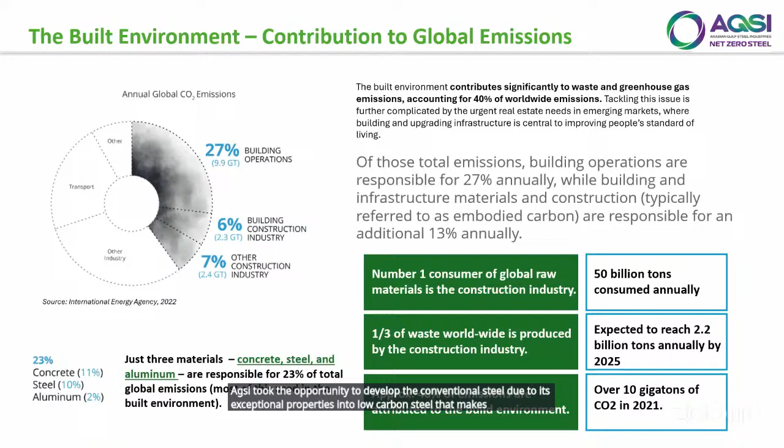Before I go in deep into our company's facts and offerings, I'd like to start historically on how AGSI became as it is today. Since our commercial operation in 2016, we have been a steelmaking plant that produces only steel billets locally in the UAE. This gave us an advantage at the time, as we were the only steel makers making steel billets and supplying to the big markets and big players in this market. Before, they used to purchase these billets from outsourced abroad.

Then by, let's say, 2021, we decided to include our own rolling mills for making rebars and sections. And from that time, in just under 2 years, AGSI went from being a new entrant in the steel industry to becoming the first carbon neutral steel plant.

So just to sum up our journey, we joined the UAE Sustainable Companies Pledge, being certified twice for lowest carbon emissions in the MENA region, participation in COP28 and Climate Week NYC as a net zero case study, becoming one of the chosen champions of the Industrial Transition Accelerator, focused on decarbonizing hard-to-abate sectors like steel, cement, and heavy manufacturing. Developing collaborations and partnerships with big players in the industry, like Aldar, the Institute, and soon many more to follow. This journey reflects our belief that industrial growth and sustainability are not mutually exclusive.

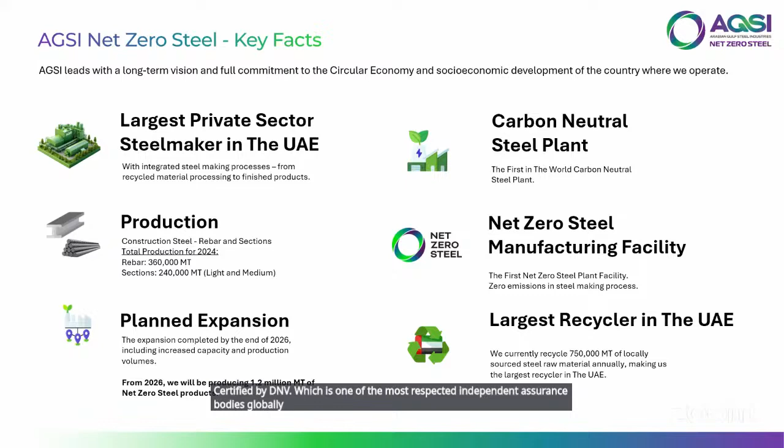So just to reiterate, AGSI produces the following: billets, rebars, and sections. All products are tailored to meet international codes and standards to be in line with project requirements when it comes to mechanical and structural properties and available grades and sizes.

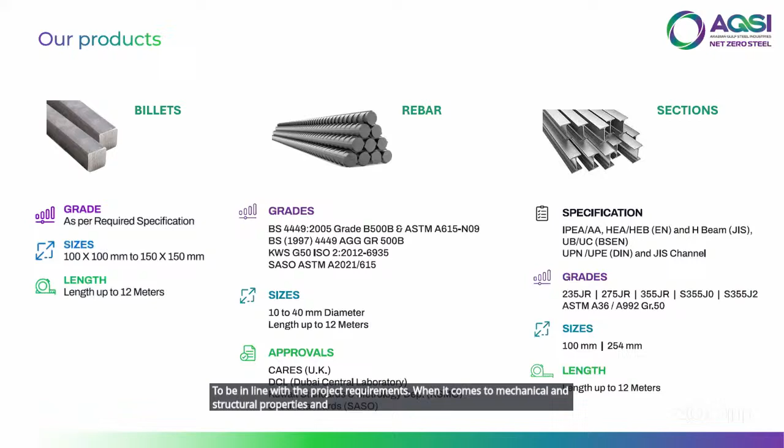So let me go through it one by one, starting with how billets are made. At AGSI, there are around 6 main procedures important for producing low carbon steel billets prior to rolling. We begin with 100% locally sourced steel scrap, which is brought to our facility in large volumes, a minimum of 50,000 tons per month.

Once the raw materials are received, it enters the scrap yard where it is unloaded and sorted based on type and composition, processed using specialized machinery like shears, shredders, and magnets to meet furnace stock specifications. On average, we process around 1,200 tons of scrap per day to feed our steel melting operation. This ensures consistent melt chemistry and energy efficiency in the furnace.

Third is the most important part: the prepared scrap is then charged into our induction furnace technology. We operate a total of 4 furnaces, each with 30-ton capacity and 12 megawatt power rating. Unlike traditional blast furnaces or electric arc furnaces, induction furnaces do not burn fuel. Instead, they use electromagnetic induction to generate heat directly within the metal, so no use of oxygen will be required, as it will be fully operational through electricity. This results in no CO2 or other greenhouse gas emissions whatsoever, more precise control over melt temperature, lower heat loss, and faster startup times. This is the cornerstone of AGSI's net zero strategy: clean, efficient, and scalable steel melting.

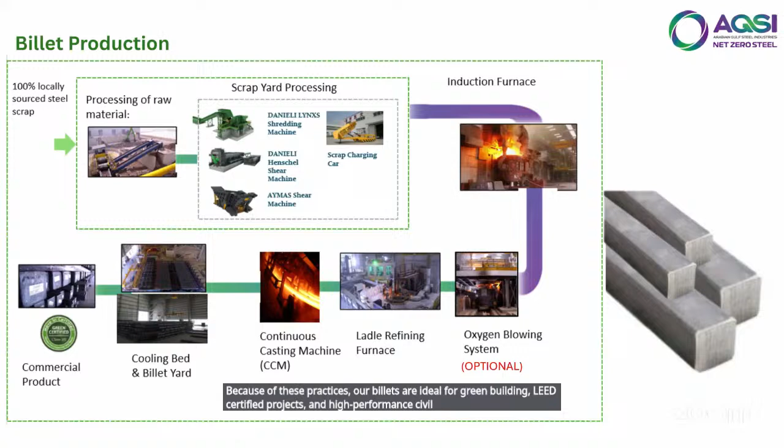Now let's delve into the rebar mill process. The first stage is the reheating furnace. Here, the cold billets are fed into a high temperature furnace where they are heated uniformly to about 1,100 to 1,250 degrees Celsius. The purpose of this is to soften the billets and make them suitable for plastic deformation. Uniform heating is crucial not just for rolling efficiency, but also to prevent internal stresses or non-uniform grain structures, which could compromise the final mechanical properties.

Once the billets exit the furnace, they enter the rolling mill stands. These are multiple rolling passes arranged in sequences of roughing, intermediate, and finishing stands. This is where the billet's cross-section is progressively reduced. At AGSI, our rolling mill is designed for high throughput and dimensional accuracy. The billet is transformed from a solid square profile into the round, ribbed profile of a rebar, at speeds that can exceed 15 meters per second.

The rib patterns are essential for bond strength with concrete. They are rolled directly into the bar during the finishing stand phase. Rib geometry is precisely controlled as per international standards such as BS 4449 or ASTM A615.

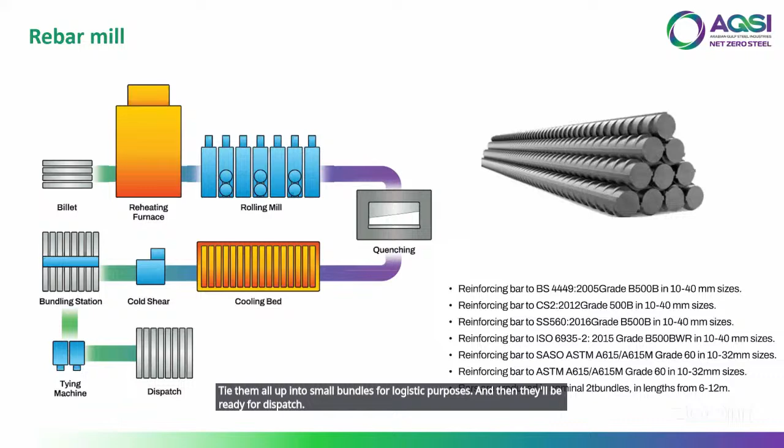Now, just to show you the insights of this process: the QST treated rebars offer superior weldability and lower carbon equivalency compared to traditional microalloyed rebars. Our rebars undergo routine tensile, bend, rebend, and fatigue tests as per international standards. We can produce grades up to 600 megapascals of yield strength, suitable for high-rise and infrastructure. This is very important because it supersedes the standard requirement.

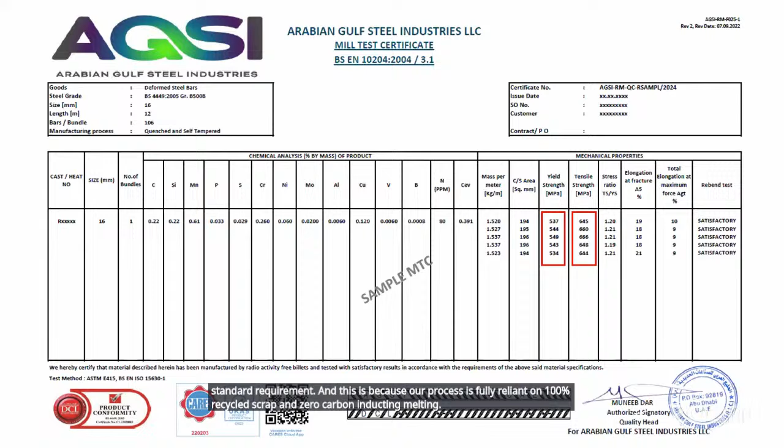And this is because our process is fully reliant on 100% recycled scrap and zero carbon induction melting. We don't just do these tests internally; we make sure that our findings are backed up by certified third-party agencies before commissioning to our consumers.

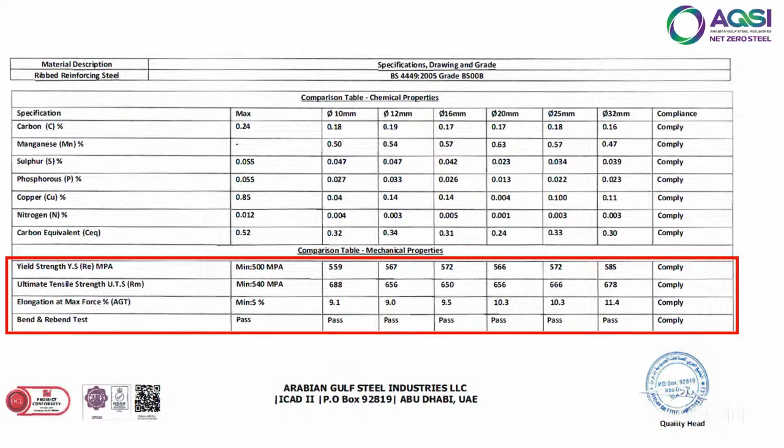Last but not least, we'll talk about the section mill. It is relatively the same as the rebars, but has some extra processes due to its complex design.

It goes to the reheating furnace at the beginning. The billets will go to the reheating furnace, and the same application applies. After the reheating furnace, the billet enters the reversing mill.

Unlike a continuous mill, this system consists of a set of rolling stands where the billet is passed back and forth multiple times, with the roll gap adjusted in each pass to achieve a desired shape. This multi-pass reversing process allows for a gradual and controlled reduction in thickness and width, which is especially beneficial when rolling complex profiles. This also gives us flexibility in roll configurations and allows us to roll both symmetric and asymmetric sections.

After the reversing process, the semi-finished profile enters the finishing mill. Here, the geometry is finalized and surface finishes are improved. At this stage, the exact dimensions of flanges, webs, or edges are refined to within millimeter level tolerances. What makes this step special at AGSI is the capability to change roll sets quickly and accommodate different section profiles.

The next step, which is the same as in the rebars, is the cooling bed, where the finished sections are laid out under ambient air. Once cooled, the profiles are passed through the straightener. This machine uses a series of adjustable rolls to correct any remaining curvature or camber in the product. Straightness is critical, especially for structural applications, and the AGSI plant is capable of achieving tolerances well within the desired standards for dimensional accuracy.

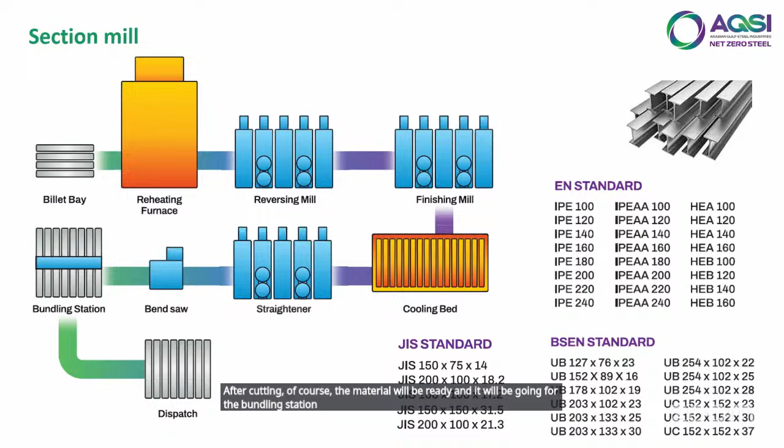So some insights on the section mill. The reversing mill setup is particularly efficient for low volume or custom profile production, ideal for infrastructure, OEMs, and modular steel systems. AGSI uses low carbon steel grades with high weldability and ductility, making them suitable for seismic zones. Our rolling is backed by mechanical testing like Charpy impact, UTM tensile, bend, and macro etching to verify grain structural integrity.

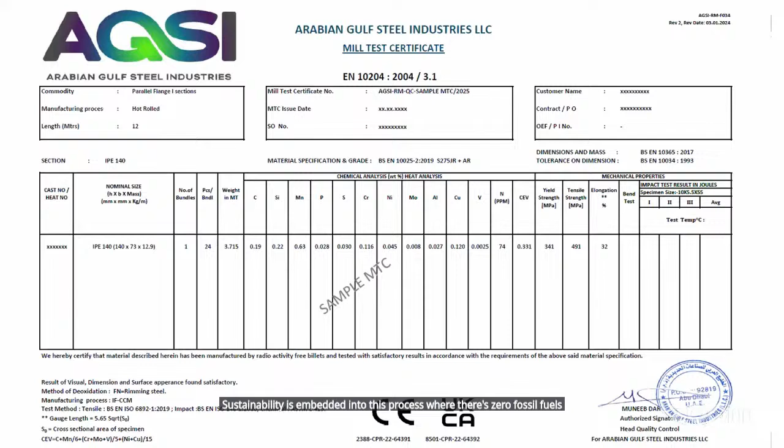Sustainability is embedded into this process where there's zero fossil fuels, zero carbon melting, and energy recovery systems in the furnace.

Now, before I end this topic on the sections, just the slide details are on the sections that we offer exactly and some of its applications. So, in general, we have the IPE, IPE AA, HEA, HEB, UB, and UC profiles.

The IPE and IPE AA beams are ideal for floor beams, secondary framing, and general structural use. The AA series is lighter and used where weight savings are critical without sacrificing rigidity. The HEA and HEB beams are wide flange beams. HEA is optimized for medium load structures, while HEB offers higher load capacity structures, specifically in transfer beams and bridge decks.

UB, or universal beams, are taller than they are wide. These are ideal for spanning applications like bridge girders and long span trusses. Universal columns are nearly square in dimension and are used as vertical load-bearing members in buildings and towers.

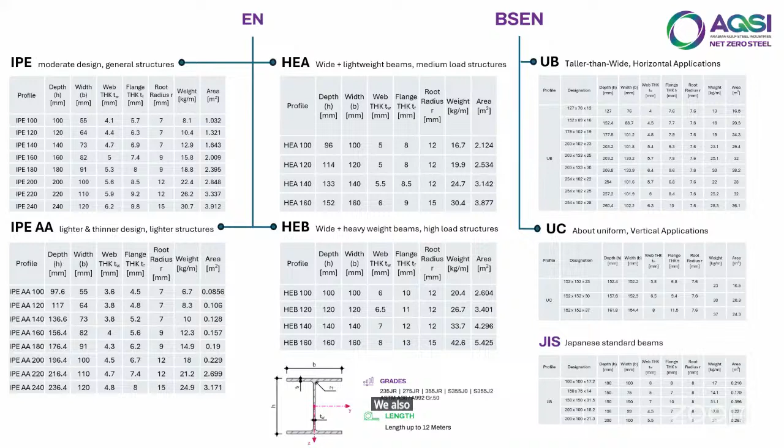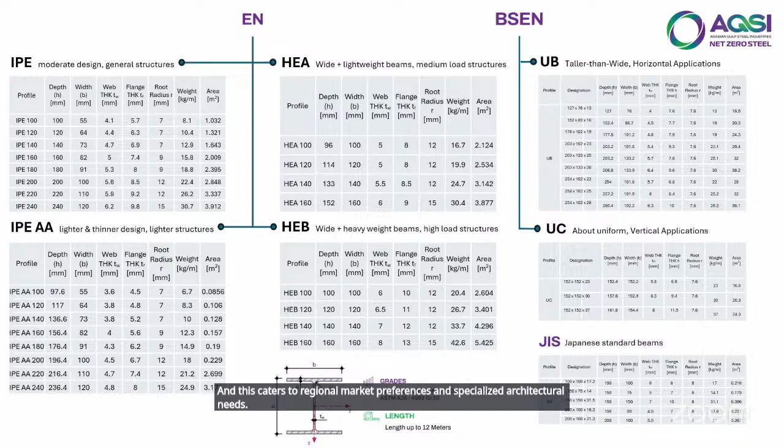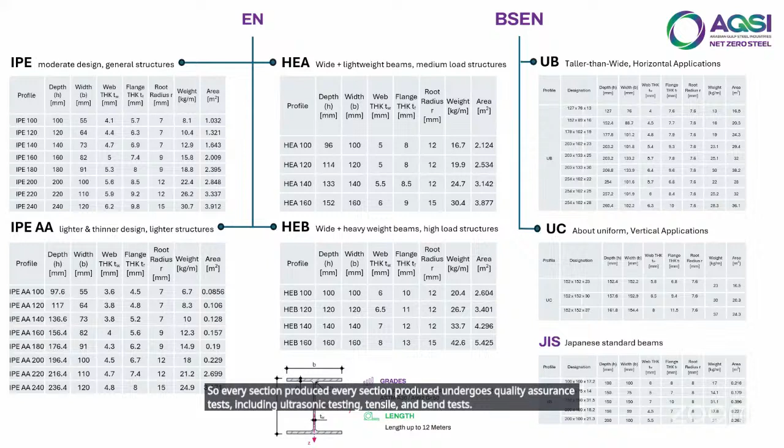We also offer the JIS profiles, which stands for Japanese Industrial Standard, and this caters to regional market preferences and specialized architectural needs. So every section produced undergoes quality assurance tests, including ultrasonic testing, tensile, and bend tests, to guarantee performance with regional and international structural steel codes.

Now, this one is just to show you a simplified version of our net zero steel making process. First, we have the scrap collection and sorting. Then we have the melting in our induction furnaces. Then comes the refining and alloying of the molten steel. Then the continuous casting into billets. Then hot rolling into rebars and sections. And finally, cooling and cutting for final product generation.

This process has supported us in achieving a high in-country value requirement due to our local sourcing and production applications which meets the UAE's Net Zero 2050 vision.

Just to give you an interesting fact, globally, over 630 million tons of steel are recycled annually. Every ton of recycled steel saves around 1.5 tons of carbon dioxide, 1.4 tons of iron ore, 0.6 tons of coal, and 0.05 tons of limestone.

Using recycled scrap reduces energy consumption by up to 74% compared to using virgin iron ore. AGSI processes around 40 to 50,000 tons of local scrap per month, enough to build the steel structure of a Burj Khalifa-sized tower every 45 to 50 days.

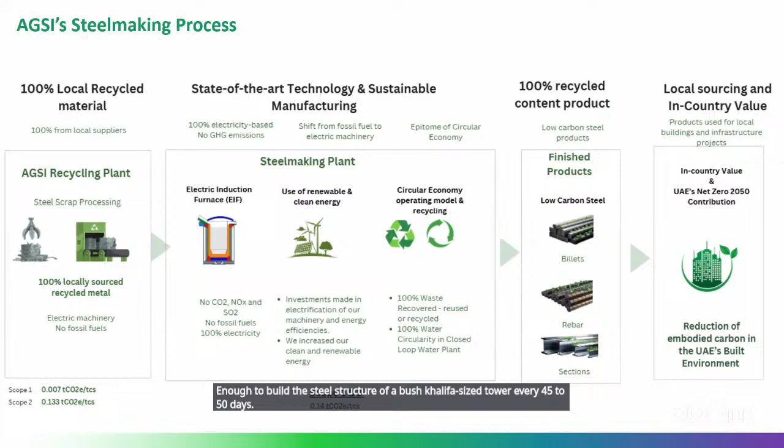Our carbon neutrality is the result of real, measurable reductions in process emissions. The key to this lies in our use of induction furnaces, which operate without fossil fuels, unlike traditional blast furnaces which rely on coke, a high carbon fuel, to reduce iron ore into molten iron. Because we rely exclusively on 100% recycled scrap and use renewable electricity for minimal offsets, we eliminate Scope 1 and Scope 2 emissions from the production cycle.

These efficiencies are verified annually, with our emission levels confirmed at 0.14 tons of CO2 equivalent per ton of crude steel made. This is a benchmark achievement in the global steel industry.

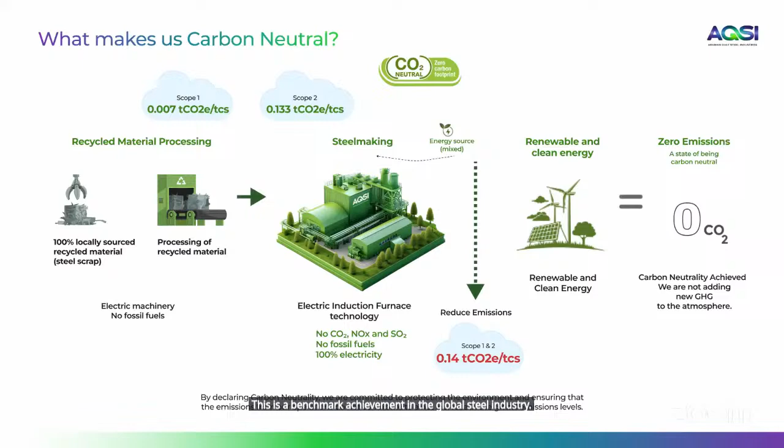Another method of secondary steelmaking is the EAF route, or electric arc furnace route. True, this method uses 100% recycled steel scrap, but the arc furnace requires oxygen to provide the heating and efficiency needed for a well-produced finished product.

Primary steelmaking is still being used, but not recommended, especially in this region. They would need to extract molten iron from iron ore, and this requires huge amounts of energy and oxygen, resulting in immense loads of emissions.

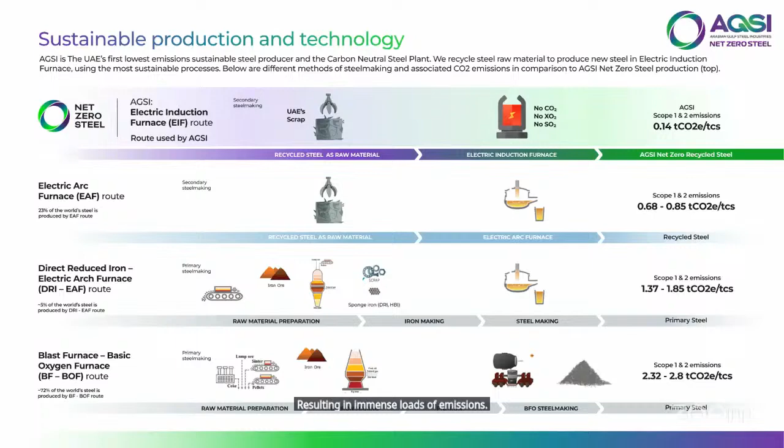As mentioned before, we commissioned independent audits by DNV to validate our net zero claims. These audits were conducted in line with two gold standard protocols: ISO 14064-3 for greenhouse gas accounting, and PAS 2060 for carbon neutrality certification. These certifications confirm that our operations, from raw material input to final product, produce zero net emissions.

What's even more important is that these reductions are real, measurable, and replicable, not based on future promises whatsoever. That's critical for projects that want to secure sustainable financing or meet ESG reporting thresholds, especially in international developments or LEED certified buildings.

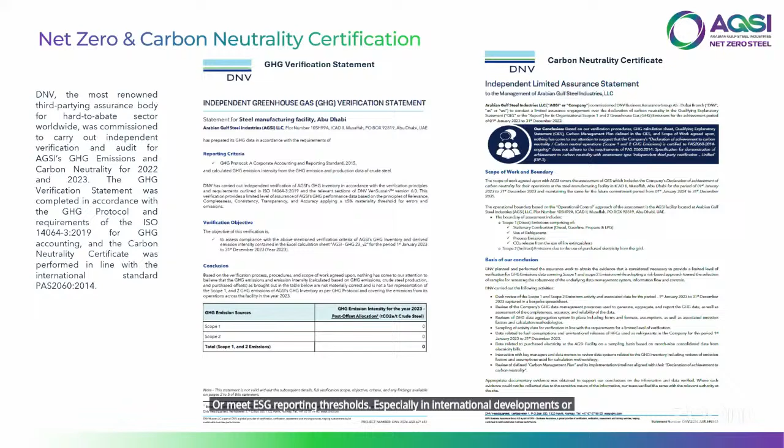So just to show you our other product quality conformity certifications, in line with local requirements for projects in the GCC and even the UAE.

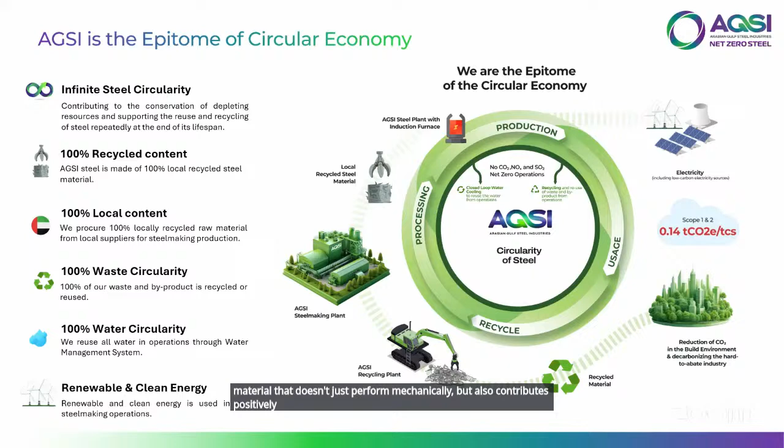Now we go a bit into ESG. Our model follows the principles of infinite circularity in steel production. We use 100% recycled steel waste, avoiding virgin ore extraction. All waste and byproducts like mill scale, slag, and fumes are reused or recycled into industrial inputs like cement. Most importantly, our electricity supply is powered by clean and renewable energy, which is a critical enabler of low emission steel. This means specifying material that doesn't just perform mechanically, but also contributes positively to your project's sustainability and life cycle assessments.

AGSI's strategy is not just about carbon reduction, it is a complete environmental, social, and governance transformation, aligned with the UNGC's, or United Nations Global Compact, Sustainable Development Goals and the 2030 Agenda. Some of these goals include, but are not limited to, industry innovation and infrastructure, responsible consumption and production, climate action, clean water and sanitation, affordable and clean energy, and partnerships for the goals. These involve collaborations with climate groups and industrial platforms.

This global alignment gives added assurance to international consultants and developers looking to source from socially responsible suppliers.

Now, how are we contributing to LEED? Why sustainability for buildings? That's the main question here. Sustainable buildings reduce energy and water use, cut carbon emissions, and lower operating costs. As a result, they can boost property values up to 26%, increase occupancy rates to 96%, and tap into a fast-growing green finance market, while also enhancing brand value and demonstrating leadership in sustainability.

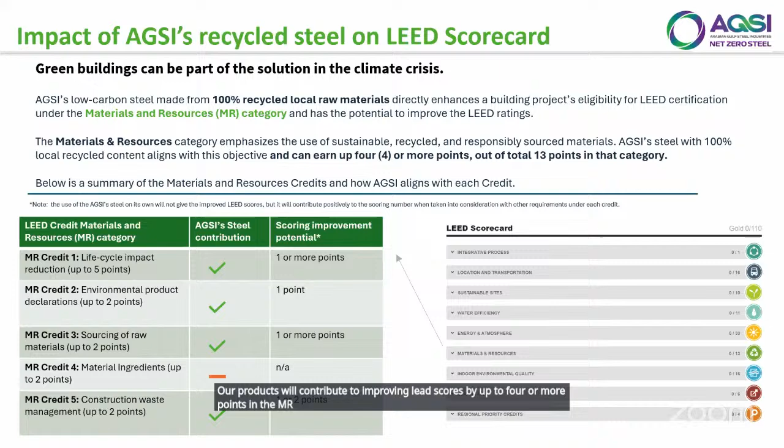So let's break this down a bit further. For Credit 1, life cycle impact reduction, from a total of 4 options under this credit, our low carbon steel supports the 4th LEED option, the whole building life cycle assessment. Using AGSI steel can help earn at least 1 point, especially when a project meets 3 out of 6 impact categories like global warming potential, depletion of non-renewable resources, or acidification.

Credit 2, environmental product declarations. We offer verified EPDs for our products. While a project needs 20 materials to fully earn this credit, AGSI steel counts as one of them and can help earn 1 point.

For credit 3, sourcing of raw materials, there are a total of 2 options in this credit. Our 100% recycled, locally sourced steel supports both options, contributing 1 or more points for responsible extraction practices and local sourcing transparency.

The last credit, credit 5, from the 2 options available, our fully recycled steel supports the first option of diversion efforts. If the project diverts 75% of waste from at least 4 streams, 2 full points are achievable.

In short, AGSI steel is not just structurally sound, it's a material that supports project certification, lowers embodied carbon, and enhances investor confidence in green assets.

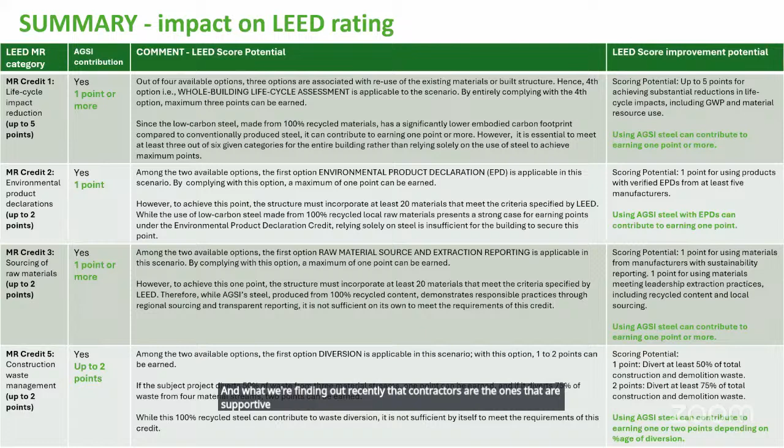What we're finding recently is that contractors are the ones that are supportive, but contractors mainly care about three things: price, payment, and availability. However, some, like Trojan Contracting, are focusing on sustainability, and they've supported us with getting approvals in Abu Dhabi. Our partnership with Aldar is also helping. So we still approach consultants because we want them to understand the importance of net zero. If a building's requirement doesn't call for full sustainability, that's fine, but at least a sustainable or net zero specification should be implemented for a specific amount in all buildings.

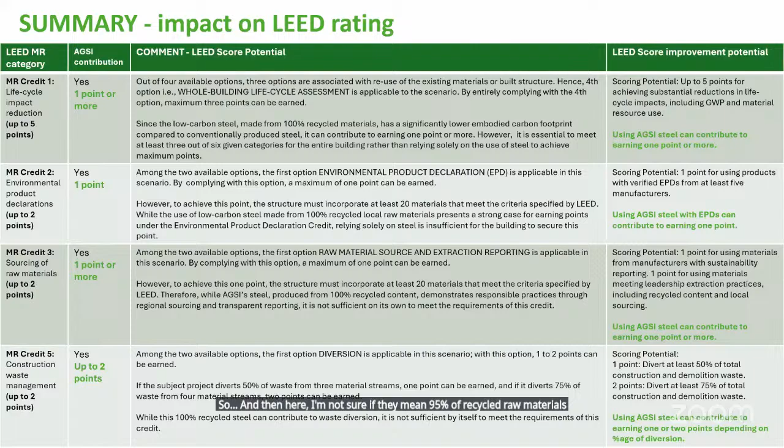Other steel suppliers' EPDs say their steel has 95% recycled materials. How advantageous is AGSI in achieving the credits compared to them? I'm not sure if they mean 95% of recycled raw materials or recycled content. In our case, our raw material is basically 100%.